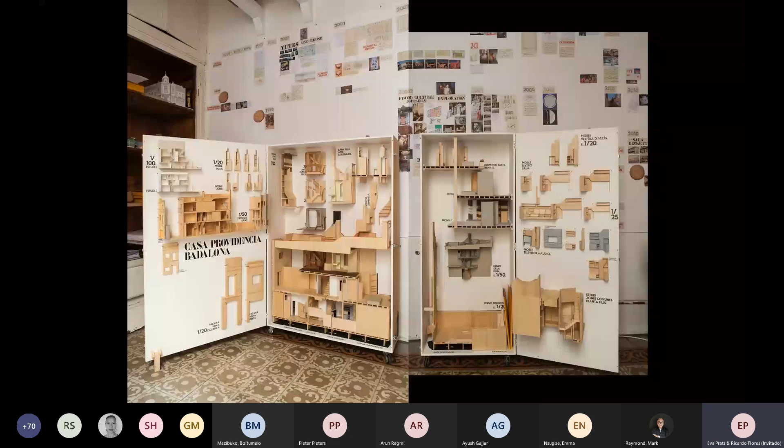Sometimes they are collected chronologically, sometimes by families, by themes, by topics that were investigated. These trunks have wheels and can move along the corridors, as you see them now, parked in the corner, so you can move them away.

This flat is passing from street to court, from interior court here. It's very long, more than 13 meters, and it has these beautiful materials that were very ordinary materials at the moment they were done.

The pavements, the roses, the windows, the doors, they were materials that were done for many other houses in the city. But because of that, we like them very much, because they represent a moment of the growth of the town.

It's important, a very big growth, when the old town turned down the protecting walls. And so there's a lot of these materials, these tiles, and there are tiles in the corridor, in the rooms, in different rooms.

Every room or every part of the corridor has a different pattern, and the patterns are very, very delicately drawn.

See, they are tiled 20 by 20. You can see them. They are small, but they build up a bigger drawing. And you can see every room is different.

They are like carpets in the middle of the room. So every time you enter a different room, you remember a different drawing. And also the doors are different, and the windows as well.

The doors are different, even if it's the same house. Every room has a different way of closing. Sometimes you close a block below, but there's a glass above, or there is a double door.

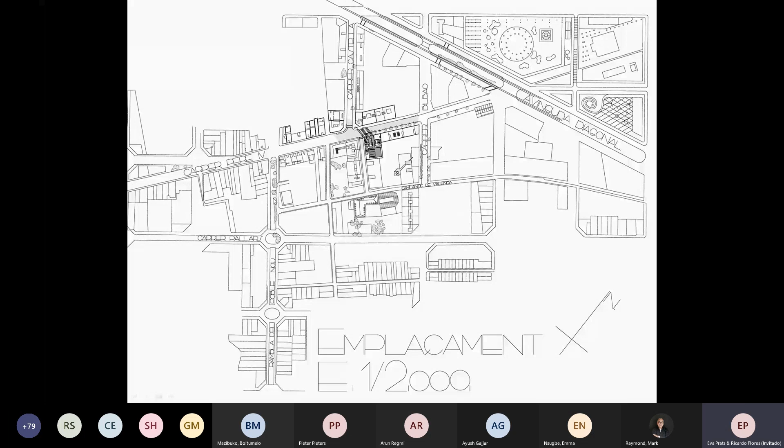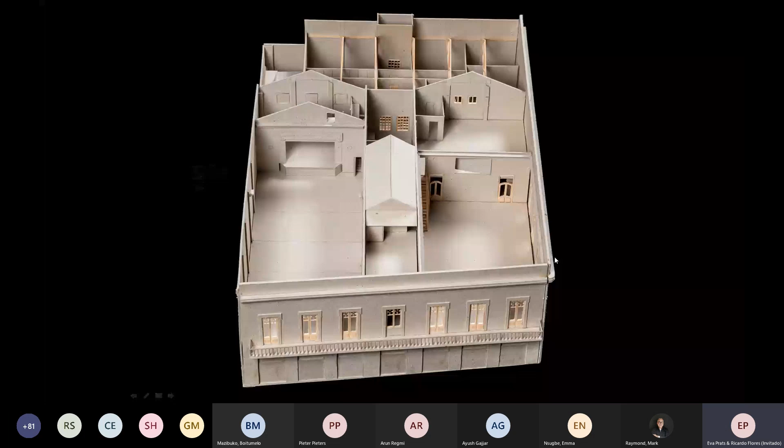So this is the state in which we found this cooperative building when we entered the competition a few years ago. As I said, the roof had been blown away, so there was water inside. The ground floor level was blocked because there had been squatters inside. It was in a very, very bad condition.

But I'm going to show you how before this state, it had a very different aspect. In the 1920s, when it opened, there was a fronton. There was this main facade with a balcony, and on top there was a balustrade and a triangle. The fronton indicated that in the center of the building you could enter through this big door, where we have a man standing, and go straight up to the first floor, where the leisure program was. We used to have a bar on the first floor and a theater, while the basement was completely used as a big grocery store.

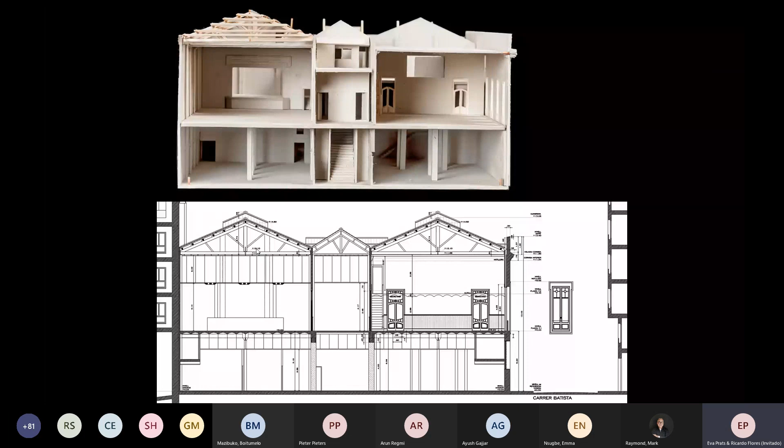Let me show you the ground floor with the grocery store, in the model that we made. On the first floor level, you can see in the center a staircase coming up, on the right we had the bar, and on the left there was a theater. As you can see in the section below, and in the model, they had an independent use. The grocery store was accessed directly from the street, and if you wanted to go up into the leisure program, you'd take this staircase straight to the first floor.

The first floor had this bar with these pools — it was really great, these big rooms, the tiles you can see in the picture similar to the ones we have in the studio, from more or less the same period it was built. The grocery store had natural light and a beautiful, big space. These were pictures from the beginning of this building. But when we found it, when we were visiting during the competition, this space, this room, looked completely unrecognizable.

So it had been blocked. There was a gym for a while that tried to make some business here. So they blocked the facade with mirrors.

The old pillars were also covered. They put fake wood on the floor, and also they started adding mezzanine levels, with smaller staircases and mezzanine levels, so this big space was kind of losing its quality, its generosity. They also organized a swimming pool that was in this stage.

So there were no traces on the ground floor level of this previous past. But on the first floor, we could still find this atmosphere of the 20s. This is the back part of the building. There used to be a school, and walking around, we could get into the scenario, the stage of the old theater.

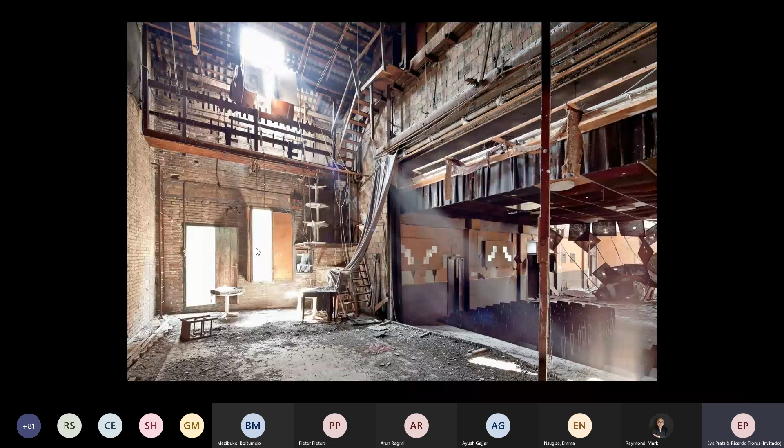As you can see, the rain was cutting in. You see the hole there, and then it was full of pigeons and rats. There were a lot of animals inside the building, but this image was kind of impressive with this ray of light. It really looks like a performance could start at any moment. So even though we were looking at a very decadent building, it had a very much like optimism or energy still to keep working again.

Because the building was not listed, it had been abandoned, it was falling down. Every summer there are strong rains here, and it was not protected. But it was very beloved by the people around the neighborhood. So they were kind of afraid because, even though they couldn't enter the building, they were seeing how the roof got bigger holes every summer.

So some rooms were in a better condition. This is the old bar, but we really liked everything we saw. We liked the generosity of these spaces. And later, we became so much familiar with the kind of tiles and doors that they have here.

Also, there was a comment when we were visiting the building for the first time. The director was with us, with the 5 teams that were competing. And I remember in this room, he commented about the value for them of having these stories written on the walls, even the decadence and the rain that has been inside of it. Because what Sala Beckett does is write new stories and then put them on show for the first time. So in writing stories for them, he thought it would be a very good company to get into this building full of stories already.

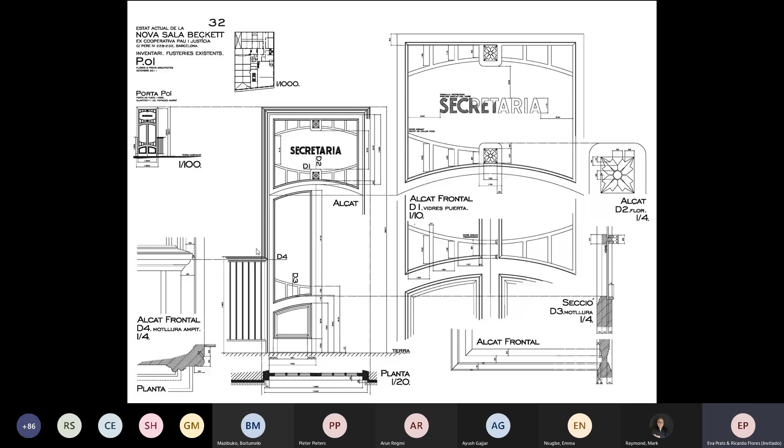And then after drawing them, we also made models of them at 1 to 50. Each window was identified, like this is window number 3. It was like a collection for us, because at the beginning we didn't know - we knew that we wanted to keep everything, but we didn't know where they could stay. But we thought everything we had found inside the building would be left there, and we would move it around depending on the program and the new situations.

So here we are working on a model. At this moment, the project was higher, growing one floor up. At the end, because of budget reasons, it didn't grow. But as you can see, little by little, we were finding a place for these old doors and windows, everything. And they had a lot of colors - this is the gentlemen's bathroom and the ladies' bathroom. So we were also aware that there were a lot of colors in them, and the colors were also interesting.

So I would like to show you a video that explains how much of these doors and windows have been recuperated - the 44 doors and 35 windows for the new Sala Beckett.

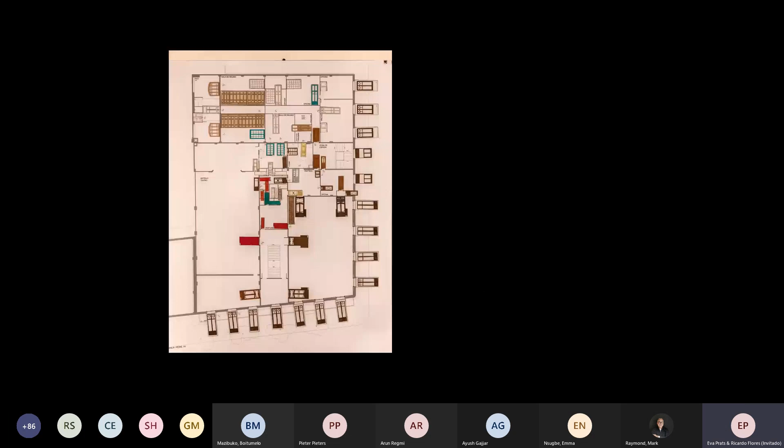You see, this is the initial status of the first floor and the project on the first floor. Then some windows will remain, and some doors will remain in the same location, only changing color.

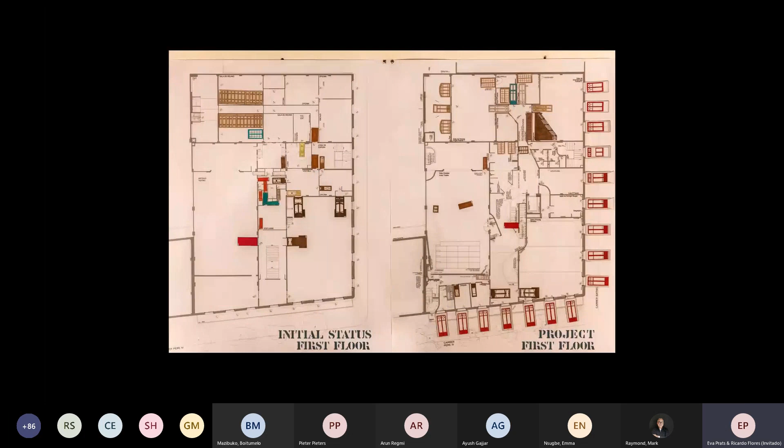But then we start moving. These ones that come from the classroom will go into the classrooms, but in a different location. Even the big staircase, we will remove it. Very small ones for some little offices. Even smaller ones, it goes for the toilets. Very different sizes, even smaller windows flying roof and then landing into another spot.

Once they were put in place, some of them change color depending on the color of the tiles that they found around. And as you can see now, this is the ground floor level of the project, and we still have some doors and windows on the first floor from the initial status that we can use, like these 2 very big doors that will relate the future bar with the vestibule.

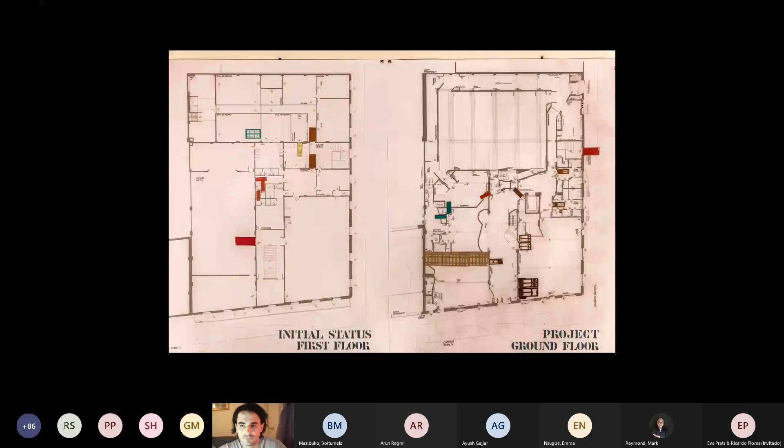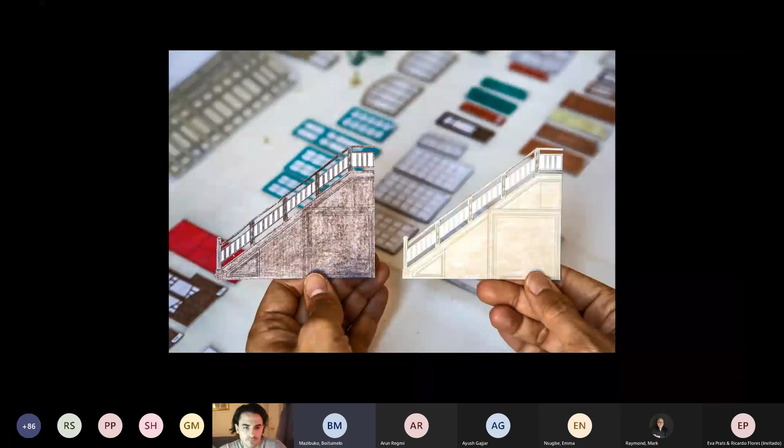Eva, are we still? Can you hear us? Eva, just have a look at your sound setting. We can't hear any sound right now. Maybe just pause the presentation and re-upload it. Maybe check your mic as well, because I can see you are muted. Okay, let's see again. Okay, sorry, let's try to share the screen again. Okay, we can see you. Everyone else, please make sure you have your videos off, your cameras off, and your mics off. Thank you. Let's see now again if we can continue. Okay, then can you hear us? Yes, I can hear you.

Okay, thank you. Well, the video was more or less finished, but could you see the video? Yes, it just stopped mid, maybe close to the end of the video. Okay, good. I'm sure your mic went mute, yeah.

Okay, no problem. So, well, there were colors not only on the windows, but also on the walls around us, even though they were in a very ruined condition, but we drew them because we understood that in this project, it was very much about these traces on the walls and colors.

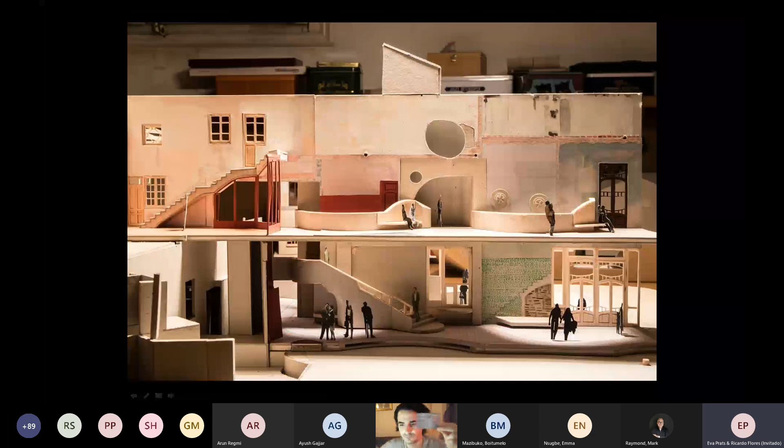So we started applying these colors on the model that was made with this gray cardboard. We started putting color in it. And also in the model, you can see the point of the project, this rehabilitation of the building with this adaptive reuse in it.

Probably it's where a lot of energy is made. We have a floor slab here, and there is light coming. It's a new floor slab, and you can see there's light coming through this hole. There are 2 holes here that you can see by the spot of light underneath.

So this vestibule connects the 2 levels. At the beginning, as I showed you, we have the section of the previous state above. As you can see, with this floor slab, there is not this visual connection between the ground floor and the first floor. But with the intervention, it deals a lot with how to connect, because the project, in this case, the program with the Sala Beckett people, works all together.

So ground floor and first floor are kind of linked. There is a theater upstairs and a theater downstairs, and people go to classes on the first floor, but from 10 in the morning when they open until around 11 at night, there are things happening in the building. So it's not just the theater that opens before the show, there are all day things going on. And as soon as you enter, this vestibule kind of indicates that it works on 2 levels.

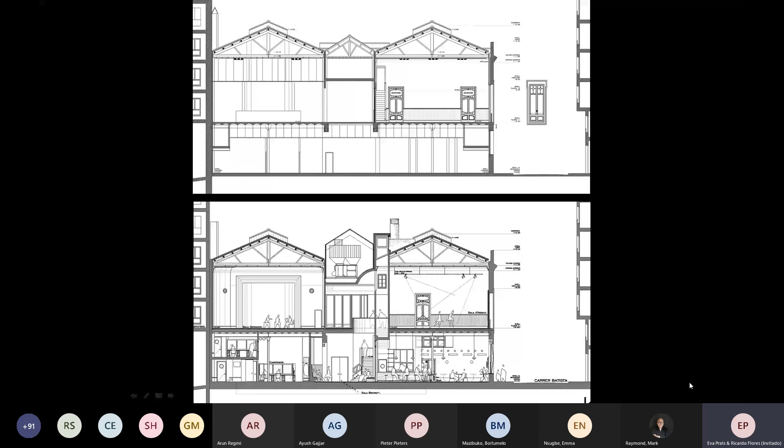So all these are very big windows, and also you have another entrance to the bar from this side. So the public will enter the theater or the school from here, from the central door, or from the bar. And there are different entrances here. What was interesting also about drawing a theater is that there are very public spaces open to everyone, and suddenly there are smaller ones, secret ones, that hide circulation and other actions also.

So the people from Sala Beckett who work here usually can enter through this small door, and also actors. The actors and actresses will go in through here. They have the dressing room, and from here they will arrive at the main room. And the main room has a lot of corridors around that the actors can appear from any direction.

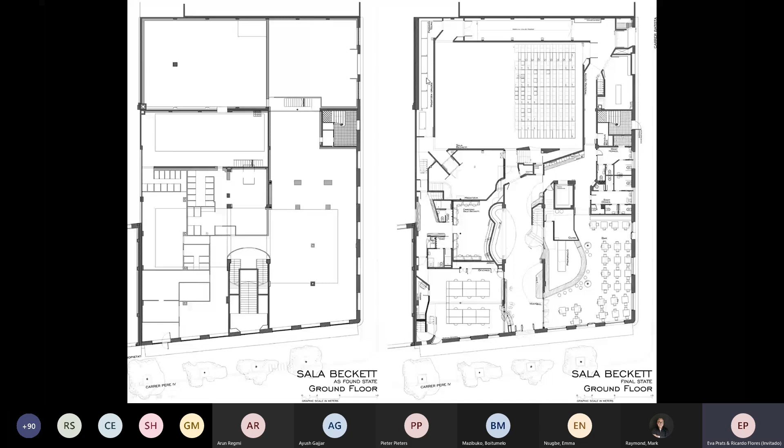So in this model that grows, we can see the wall, one wall here that contains seating, that's closing here. And from this ground floor level, you will arrive at the main show, the main theater space.

Okay, there is a mezzanine level that we found, a lot of mezzanine level. We broke some of it, but we leave some spaces for the administration and dressing room. We took it away because of the bar, we kind of recover. We want to recover the big volumes.

There is a club for the authors here. It's a very special place because from here, from the window, they can look who's in the bar. But also they can go kind of secretly and have a look from the control cabin at what's going on the stage.

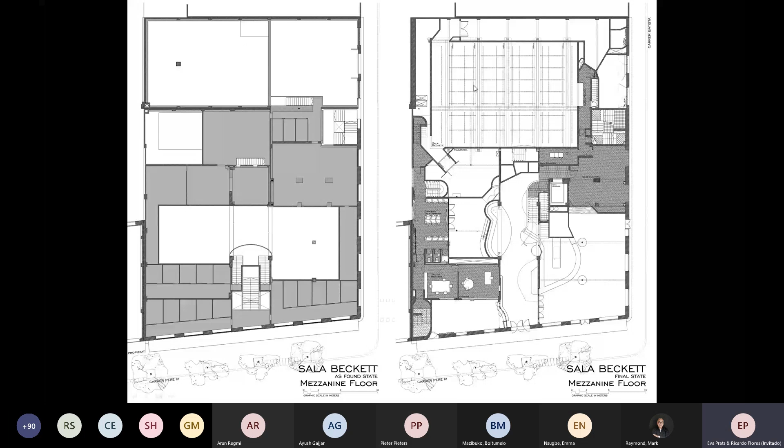So there is, in the model you can see here, these 2 theaters working on this building. We have the one downstairs. This part is the old classes that keep working as classes nowadays, and we have 2 dressing rooms, one here and the other one above.

So the one above is for the actors who will play in the theater above. That's the old theater that we found being kind of restored, and the roof has been restored, but it doesn't - before it was longer. Nowadays there is a buffer area in between the theater and the street that it's occupied by offices of Sala Beckett people.

Okay, and I'll show you the first floor, how it works today. So you can see the old bar, now it's a rehearsal room in the corner, and the old theater was very long, now it's shorter, and here we have the offices.

And this corridor in the middle, we have worked to make a connection of it until the classes area. In the old building that you can see on the left, the school, that it's a building that came like 20 years later, was built with the same dimension of these 2 warehouses in the front. But the connection among them was not interesting because this was a program of school and there were some doors of connection, but it was not so important to have it connected.

Nowadays, the corridor in the middle, as you can see in the drawing, is a continuous path that you take from the facade until the bottom of the building. It's interesting what I was saying now, the different circulations, because here is all the public circulation in the center lobby, and then you have all the private circulation of actors and technicians in the back. So there's a lot of possibilities of connecting or disconnecting, or walking, hiding from the public, depending on the moment.

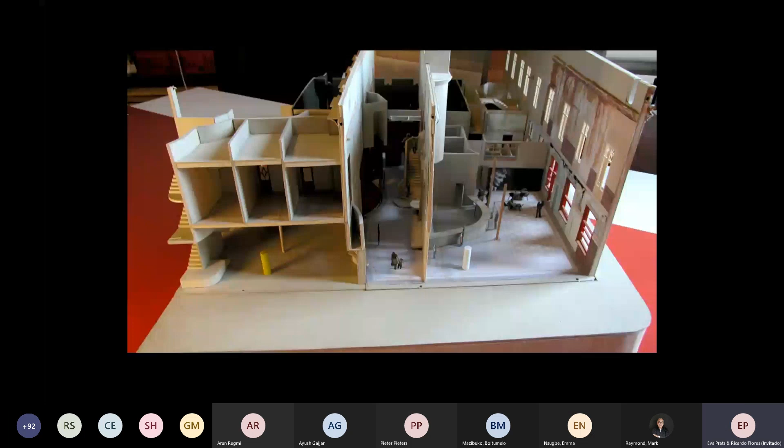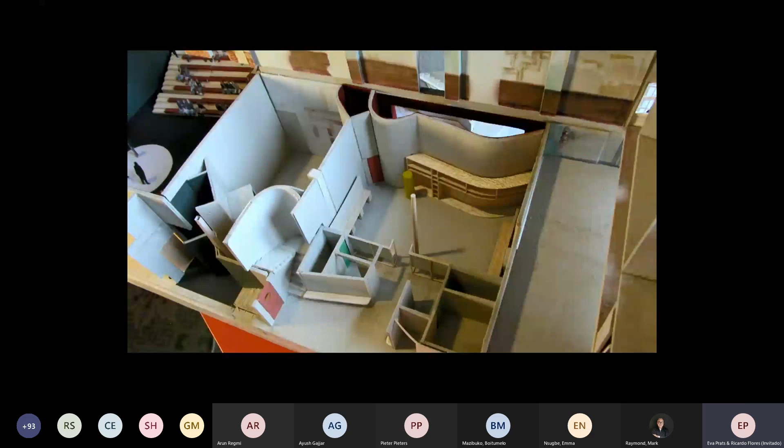In the meantime, the actor goes to the dressing room to rest and to rehearse and to concentrate. It's interesting, this wall in one side has the dressing rooms, in the other side has the sofas, with the public enjoying. You see two very different situations.

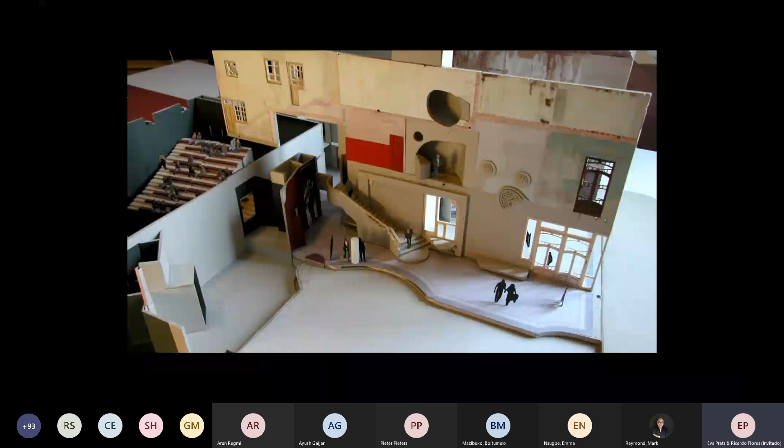Then the actor goes to the upper level because apparently they are going to perform in the upstairs theater tonight. So the public also goes upstairs to wait, to make the queue. And then it enters to the room, to the upstairs theater. In the meantime, the actor also waits in the backstage.

And then the third character appears, which is the technician. The technician goes straight to the control cabin.

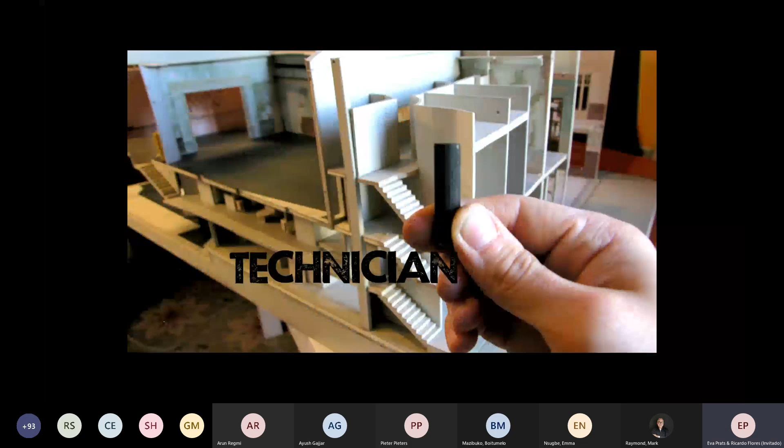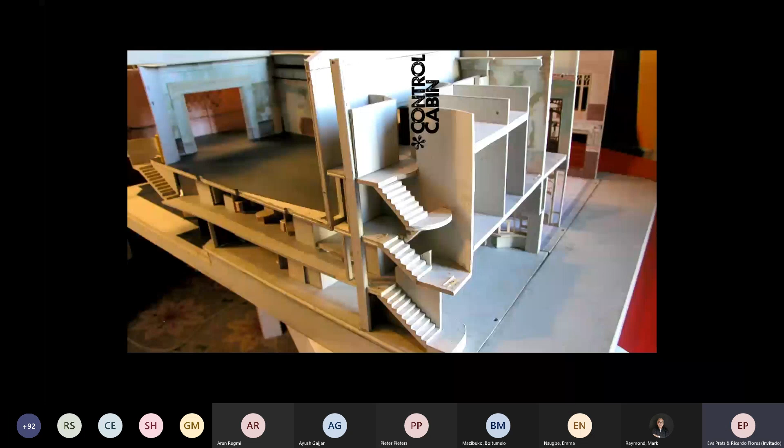And then from there, he controls all the rooms. The different configurations of seats and audience change all the time because the seats are movable. So depending on the play, they change position.

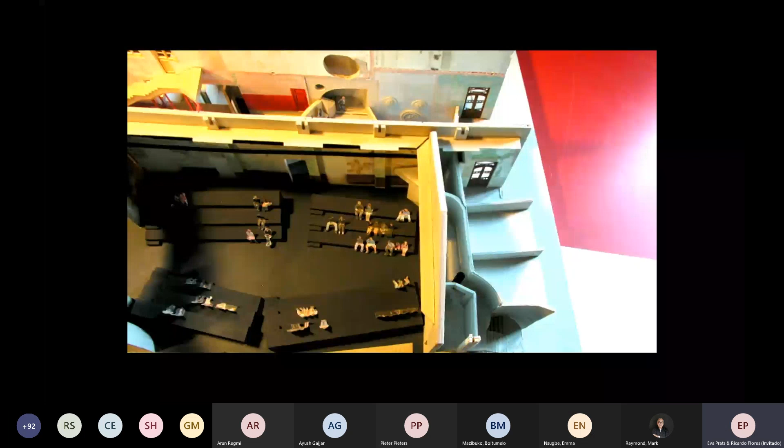When they finish, they don't hide anymore. They like to go into the vestibule, and you might find the actors or directors there. As a member of the public, if you go out and stay around, you might find the actor who has finished, and you can speak a bit and tell him or her how much you liked the play. So everyone ends up together in the balcony, looking to the street and smoking for a while.

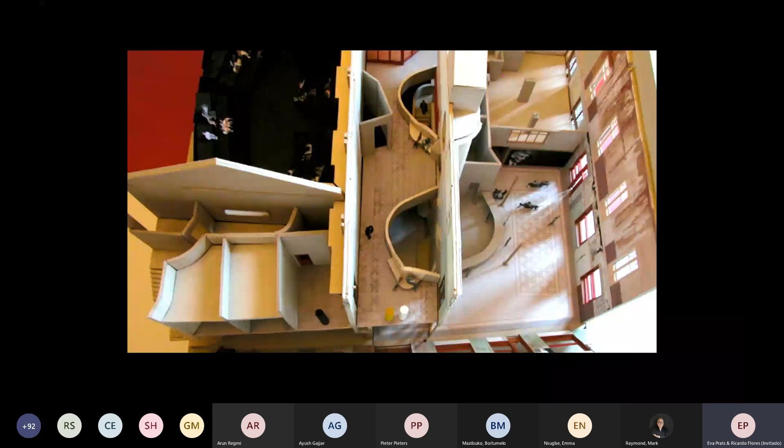Okay, so this is the situation of the project. Now I want to show you a bit about the construction site, because the construction site is very violent. Of course, it's always very violent in a rehabilitation project, in adaptive reuse.

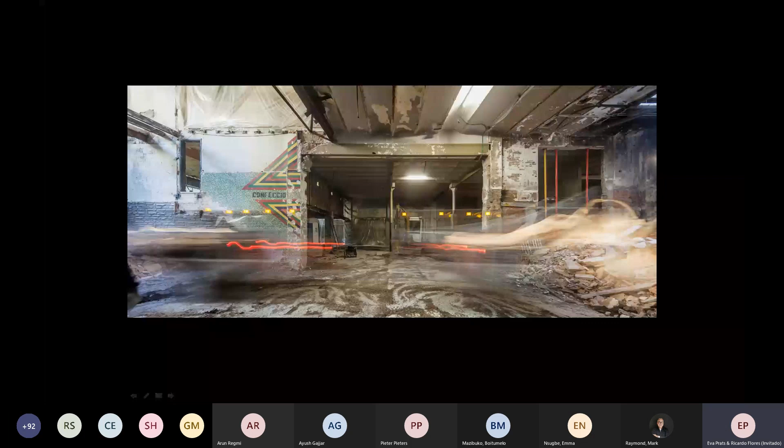So the first thing that happened in the project was to take out all the tiles, all the windows, the doors, everything that Eva showed you as an inventory that we have drawn to recuperate, was brought somewhere else to a storage place to keep it safe, while the building was being reinforced structurally and acoustically.

So we had this moment where when you take everything away, all the doors, all the tiles - fortunately we have drawn all the tiles as well. Every room, every drawing, every tile was inventoried and packed in different pallets of different patterns in storage, to remember which were the ones, each one in which room, and where they will come back, where they will land. So at a certain moment, the building is almost nude, all the naked.

Then we start to reinforce the structure, the floor slabs, also for fire, then for acoustics, all throughout the building. And in the meantime, in the lower level, we were taking out the pool of the sauna that we found there, making room for the downstairs stage or theater.

So we were lowering the level a bit, finding the earth, the original earth of this area, which used to be cultivated a bit more than 100 years ago. So we found this place.

Then there was this portico. Before, you see this wall, that was a wall of this later nave that Eva was mentioning before. We had to take it out to make a wider room of 15 meters width. So we had this big beam holding up the upper level wall to make this span with this portico structure that would allow us to have all these different configurations.

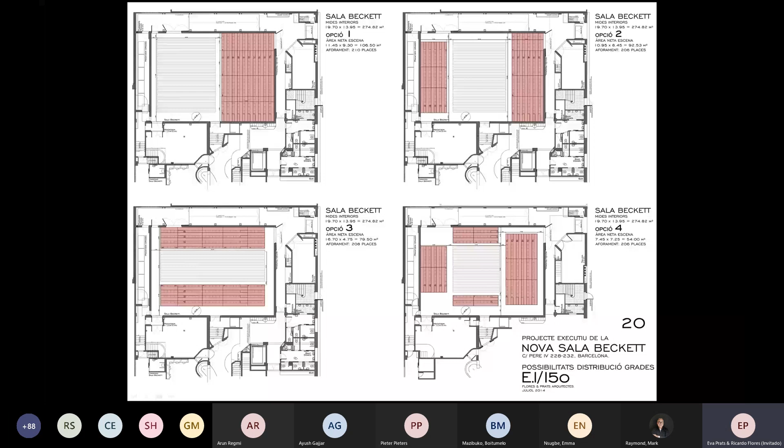The model would also allow us to understand the structure, the porticos that you see now in the ceiling, with all the technical conditions, all the mechanical installations, all the lighting, etc. So it was a model that later on we could bring to the site.

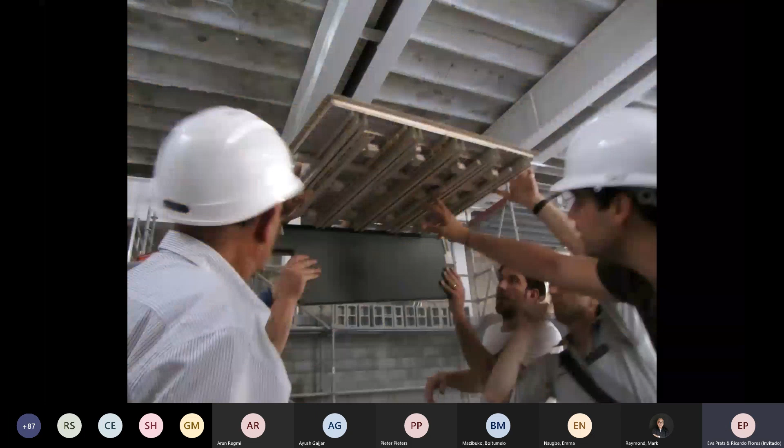You can see the real thing in the back of the model, but we were signaling, pointing where we'd like to have the diffusers of the air conditioning, and so on. So the model is for the competition, for the first assumptions, for the tests, for the evolution, for the technical aspects, and also to go into the site. It's something that accompanies us all through the process, all the way through the project.

So then you see this overlapping of the two rooms, the downstairs theater and the upstairs theater. They are overlapped, so the disconnection should be very, very strong. Before making all the floor, we had to make all these acoustical protections.

The upstairs theater is very special because it has the former walls and paintings of the former upstairs theater of the cooperative building, and also has natural light. We left all these windows, this beautiful light coming into the stage, so people at Sala Beckett can make theater during the day, having natural light, or in the evening.

You can also see all these former walls, remains of the former theater of the cooperative out there. Notice how before the wood was positioned, there's a floor slab that was an acoustic slab separating it from the downstairs level, then all the wooden structure, then the floor, and so on.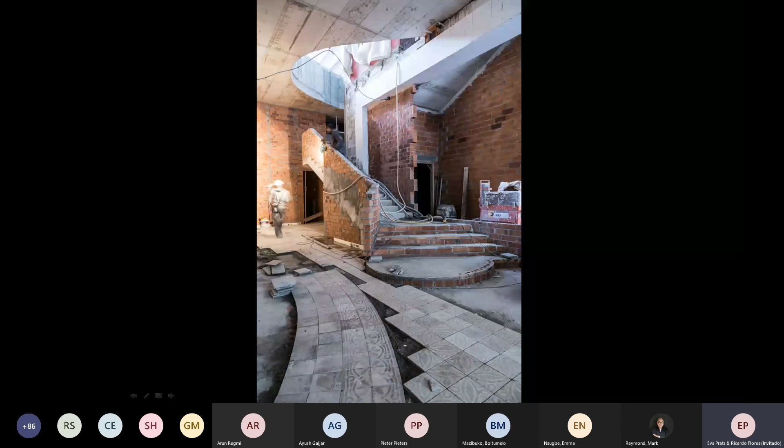So they create this new drawing which, of course, wasn't like that before, because it was in an orthogonal position. But now it's important that they follow through and make you understand that you're walking on the same ground when you're in the vestibule, the dressing room, the bar, and so on.

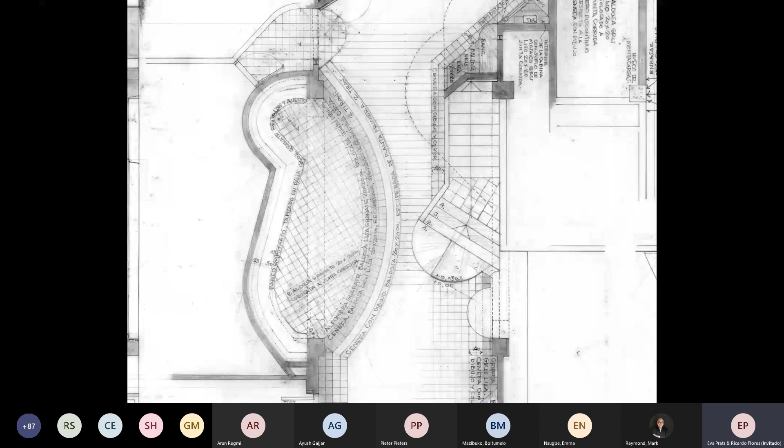All these drawings were for connecting the different levels, the ground floor you see almost on the left, the upper level on the right, or more in the center. All of this drawing is a big plan of the vestibule.

When we draw important pieces of the project, we try to make them on big sheets of paper that could contain all the dimensions of that element. For example, in this case, the vestibule.

So it's not only the plan, but also facades at scale, sections, details of the benches, everything involved in the vestibule is in the drawing.

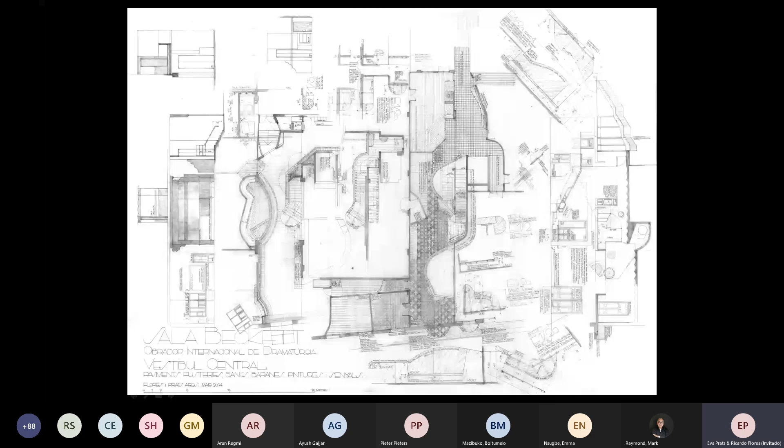Because when you walk through the space, you don't only look at the floor, but also at the handrails, the ceilings, the sections, everything together. So your eye moves from plan to section to elevation in continuity, and it's important for us that the drawing contains it all.

When you draw it all in continuity, plan, section, facade, elevation, ceiling, and so on, in one continuous hand drawing, then the space contains that kind of fluidity, and when you move around you can feel that articulation.

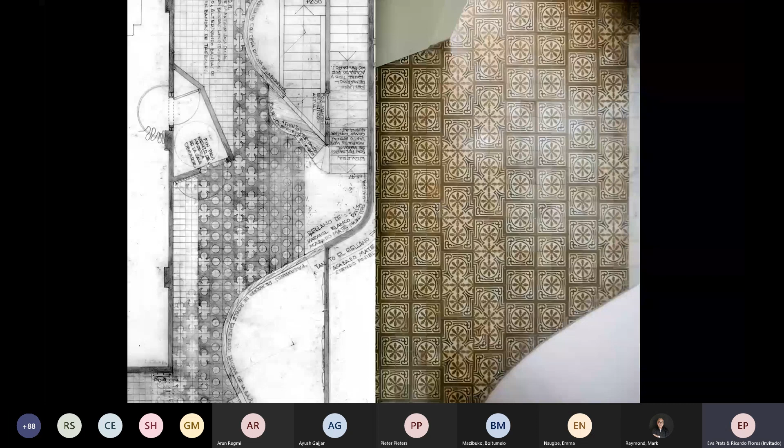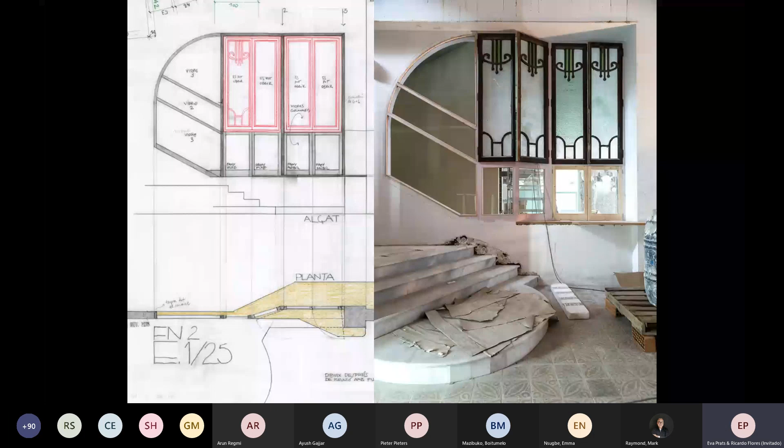It was an intention of melting the different times of the project into one continuous time. Because in the construction, there was a moment for the doors and windows to come back to the building. At this moment, everything is full of dust, but the windows arrive.

So all these things around us, and I remember the builder was asking us how to paint all this. We were looking around and thinking, there is so much information in these walls that if we decide to paint the new parts we built in one color, it would be too much of a contrast. So after discussing it, we decided we would paint also by fragments.

In this image, the volume you see on the right that pops out of the wall is a cabin to stop sound from entering the theater upstairs. We left the plaster as it is with these different tones, and we painted some kind of socle, but as you can see, it's painted completely in fragments. The same wall on the ground floor, the red wall with the sofa, is also painted fragmented.

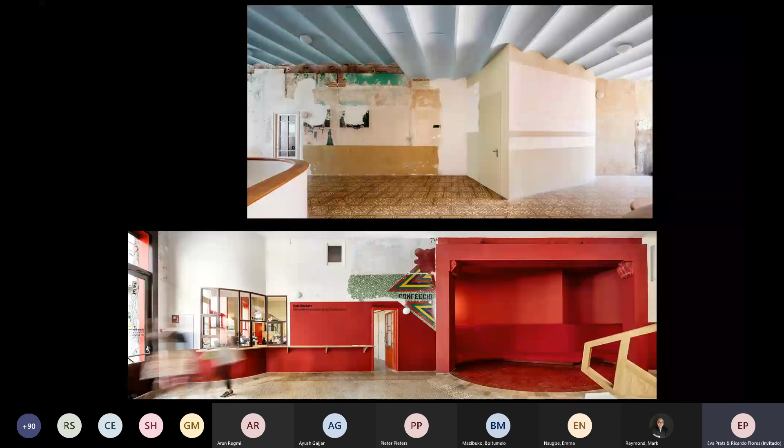So when you enter this building, the information you receive is kind of constant. There are new parts, and the new parts are painted in different colors, so it creates a kind of continuity in your mind.

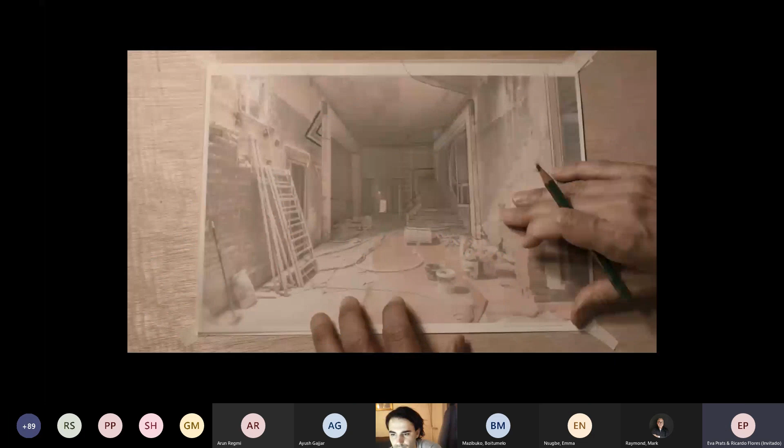Then we decided how to decide where to apply color or not. We took pictures of the construction as it was, and then worked on transparent paper over them. We first mapped the colors that were already on site, looking for clues on how to keep painting, but we did it scene to scene.

With this picture, we decided about the vestibule, which was also very fragmentary. So this door becomes red, and here we are in the bar. The pillars become green because we have some green tiles that have been left. This door will also become green. The old theater had green and brown, and we distributed colors using these first clues, also deciding about the new wall—this curved wall is new, but we painted it the same.

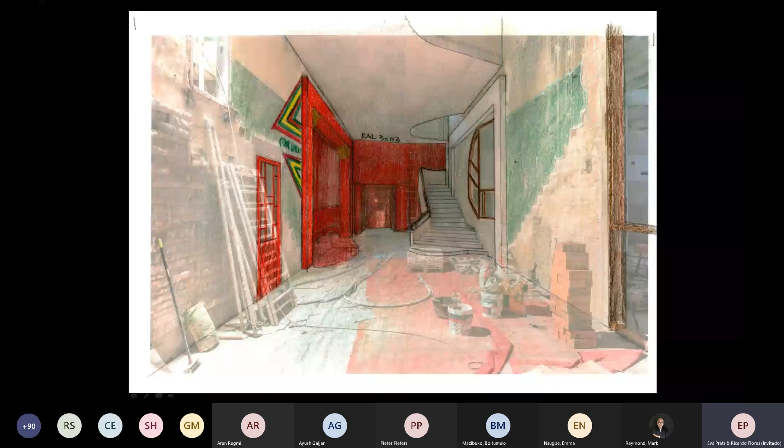So this was the method we used to decide about these colors. When this drawing was finished, we hung it on the wall of the construction site, and the painter would go there to check which numbers to use. You can see the numbers of the codes for the different colors.

For instance, this is interesting: all these walls are new, it's a dressing room downstairs. The tiles come from above, from upstairs—we reuse them, and then we choose different colors depending on the tiles. But we also change the color depending on the wall to make a variation.

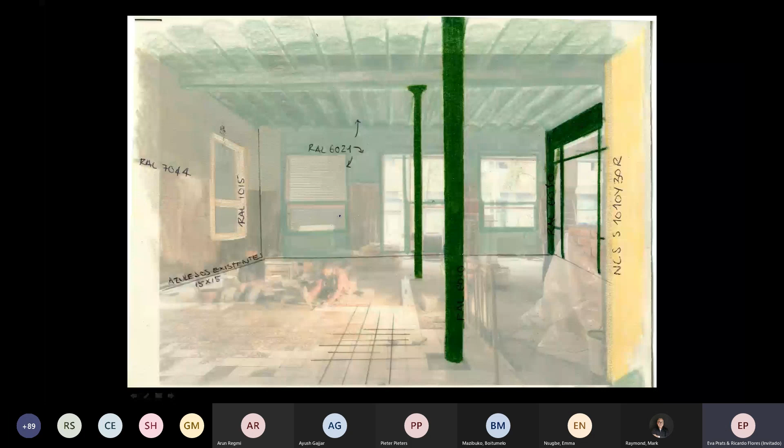In the bars, you can see a lot of green, and also the big doors that came from above, where it says 'Secretaria'—this one is painted green on this side and keeps the brown on the other. So all these different tiles and grocery store cans give us clues for the color, and we left this accumulation of time on the walls. There are big windows, very big windows—one is green next to the green tiles, the others are white.

At the end, we had the sections of the building, which were just lines in black and white, and we kept adding this color information. So we archive it, so that when they have to repaint, they have these documents, and they can check which color to apply. In the central space, as I told you before, is the vestibule, where the intensity of the building is very much concentrated.

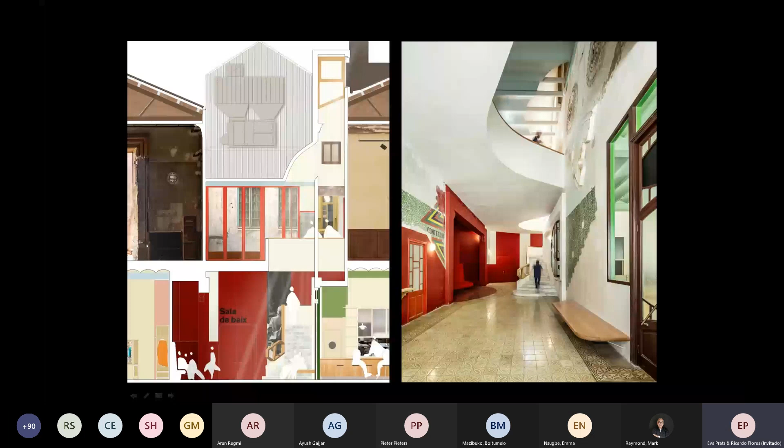On the picture on the right, you can see you step inside the building, and in two steps you can see upstairs there's something going on. So the building works together for the ground floor and first floor. And we have light coming in. You can see on the left, there is some light falling from above. And we have a lot of machines here.

We wanted to have a skylight in the middle of the building and bring energy to its center. But the engineer was asking for bigger and bigger machines each time, so at the end we had to take the light from one side. At the beginning this skylight was direct, but in this case it became more interesting because of the engineer, and we made it come from one side. So here you cannot see the hole where the light is coming, but you just see the effect of the light coming down. It's here.

We have the rosettes of decoration, and this is a drawing we made at the end of the work. It was a very intuitive decision, and when we discovered it we decided to make a drawing on this wall, because all the decoration, all the circulation and the light is kind of dedicated to it. The entrance door, the staircase is here, the skylight comes here, and you trespass this wall several times.

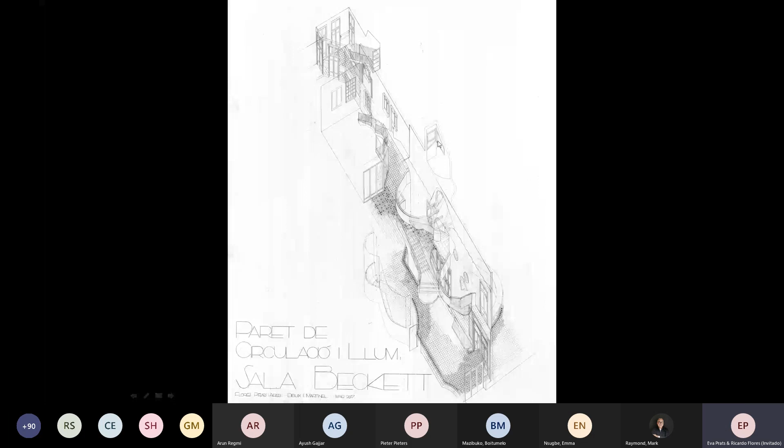You can see it also here in the model. It's this very thin wall, 15 centimeters thick, and it has the lights and the circulation around it. We trespass it here, and we have these two sides. It's very theatrical, how you appear very quickly into the vestibule, and you will cross the wall again here on the left to get into the classes at the bottom. So you have these very long views and cross views.

So it was interesting also to see how, when we opened it again to let the light trespass through it, there were more actions kind of against it, but also to make it participate.

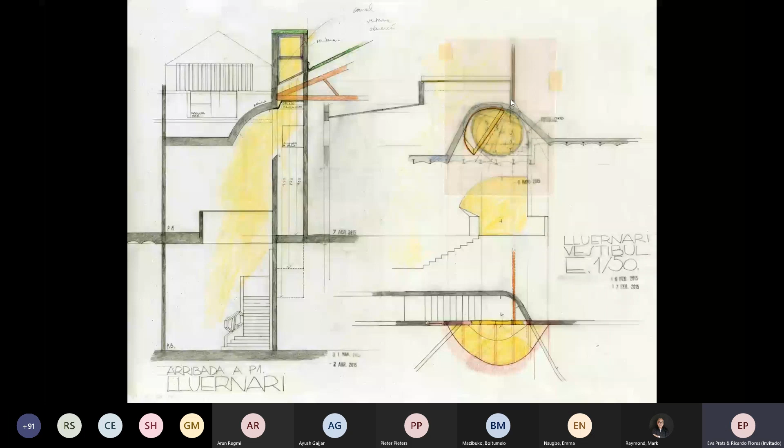So these are the drawings to make the hole. At the beginning, the hole for this wall was circular, and it had to be just half a circle, more or less, because we have a structural wooden truss here. We had to be careful. So we opened this kind of half, it's a quarter of a sphere. So we broke the floor slab, we made the hole here, and the light is getting in.

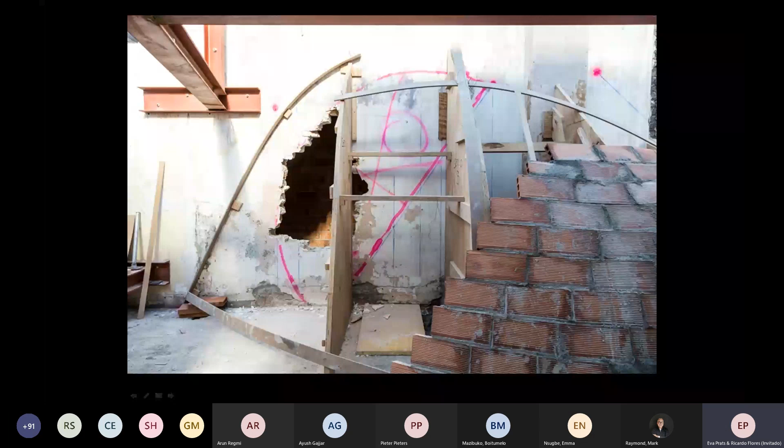So we asked to make this kind of half circle here, breaking it. It was not clear at all for the workers what they were doing when we gave this instruction, because from one side they were building this quarter of a sphere, and then breaking it to get light through, but on the other side there was still a wall. Some days later, we had the natural light getting through the wall again, and the floor slab had been broken, and we could see how this quarter of a sphere was being filled in with the natural light.

This point is kind of the central point. It has full intensity. Somehow it keeps a lot of the chapters of the story of this building together, because we have the new openings, the new distribution of Sala Beckett that has happened, and it's left here with this opening of the skylight. But you can also see the old decoration, the signals of decadence in the wall, because the rain was in here.

So for us, it reminded us somehow of what we saw when visiting the building for the first time, that we had this ray of light right there, kind of waiting, bringing energy to the building, but the building needed some care. So there was this connection among the two of us.

Among these two moments, we were invited to the Venice Biennale to participate, and the curators, Grafton Architects, were talking about free space and what the architect brings to the building besides the program, like working with the skylight. No one usually talks about this in the program, and we thought about bringing this skylight into Venice. So we made a mock-up, also because Grafton Architects were talking about having an exhibition that was experiential, not of objects. So we thought, let's build it in 1-to-1 scale, so that we will have this 18-20 meters long and 6 meters high section, as it has in Sala Beckett, and then we will need a source of natural light to make it work.

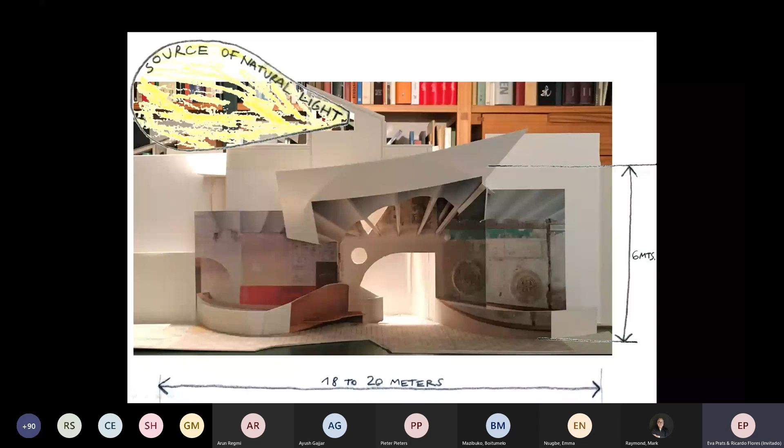So this was our proposal, and they accepted. And then we knew that we were going to be in this arsenal, in this building that they used to make the ropes for the boats.

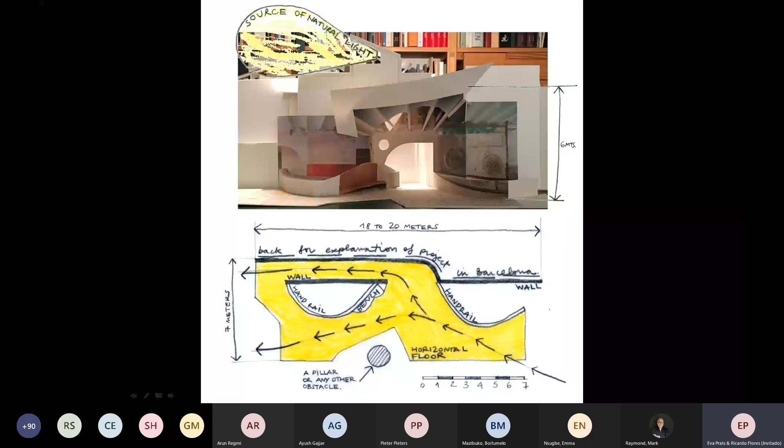In the picture, the camera doesn't show it, it seems a symmetrical building, but in fact on the right hand we have south - we're in the north hemisphere here. So south is where the sun comes, and the north has the regular light. It works opposite to you.

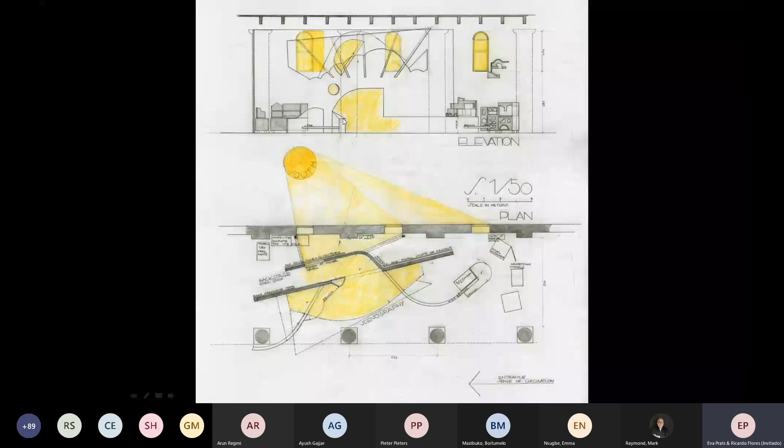So you can see there are the three windows of the Arsenale, and we will funnel the light, control the light, and as you can see here in the back, this is a funnel, and then all the light will appear at the other side of the scenography. We call one the scenography for us, and the other one the backstage.

We were controlling the light with a model in the studio, knowing how it controlled. You see what intensity of light we get here. And this is the backstage of it, and the columns you can see are the columns of this old building.

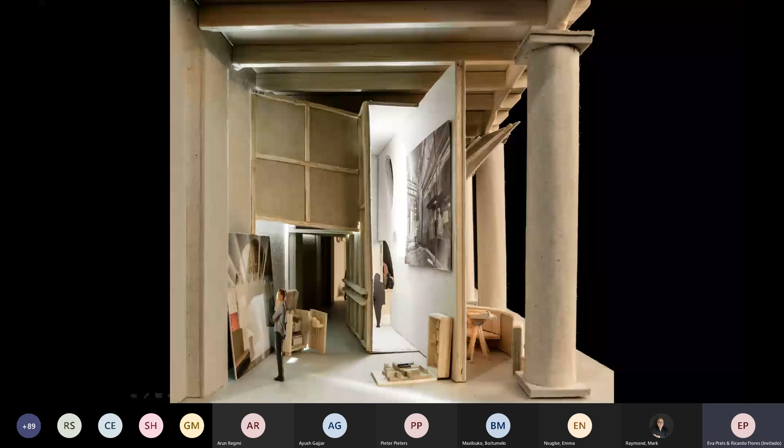If we compare the skylight on the left of Sala Beckett, we can see that the light is more vertical, so when it works as a shower it has more strength. In Venice, we had to deal with more horizontal light, so it won't be that strong.

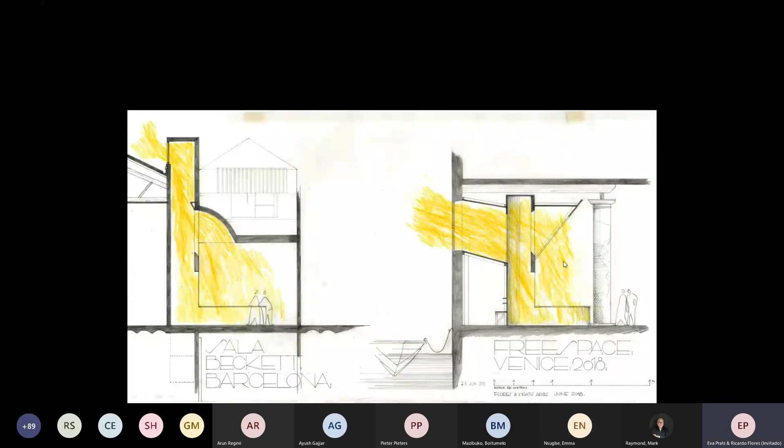That's why we were using two windows concentrated in one. These are more pictures of the model of the display.

The skylight space in Sala Beckett is 6 meters, and it fits very tight into the building. We liked it somehow, that this piece was going to be that tall and almost touching the columns - this kind of collision with the building.

We had to build everything in Barcelona, controlling it from here, also testing it here, sending pictures to Venice - they accept it, and everything travels there. And in Venice, we only had to screw it together.

This is the back side of the model with the funnel, and this is the funnel part in the carpenter's shop. So you see, in this part of the backstage, we have this table and two shelves, very long.

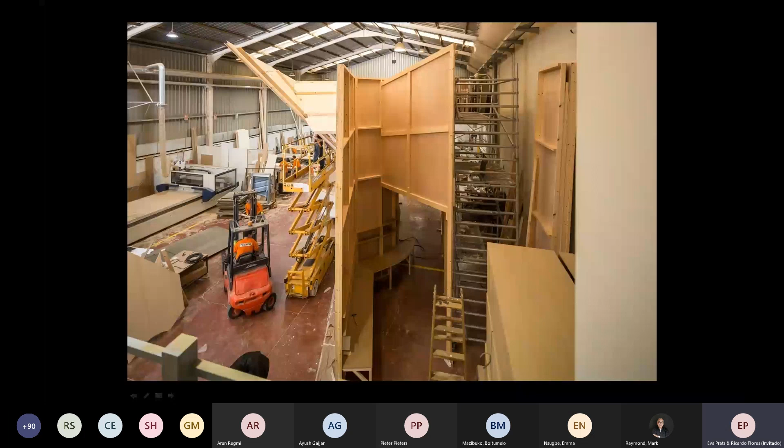This 18 meters, we decided to fill them up with all the process material that you get in the office when the building is built. But in the office, it's everywhere - there are models, documents. So we were collecting everything from the rooms and bringing it to the biggest room we have in the studio.

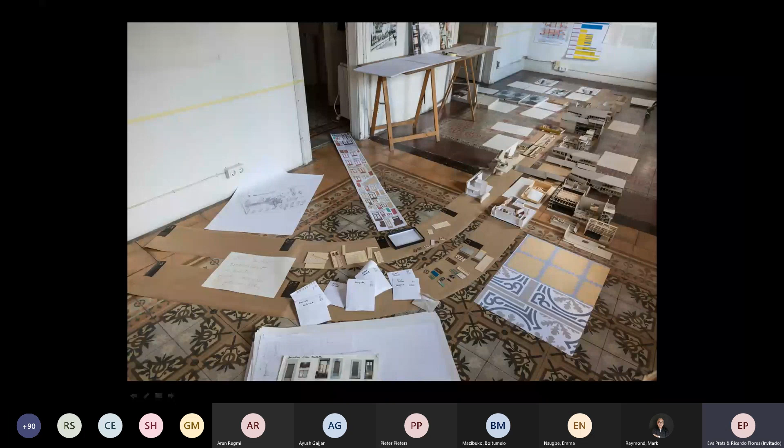Trying to make some order. After a few days, it was packed - it was kind of, we couldn't step on the floor.

So we asked the help of a carpenter who built this table, the same size as the one on the exhibition, plus the two shelves. And we could reorganize again all the models and everything.

Okay, the room was filled, as you can see there is the door. We had to go under the table to get into this room. And yeah, from here you could sit, and you were quiet in a way when you were drawing and finishing.

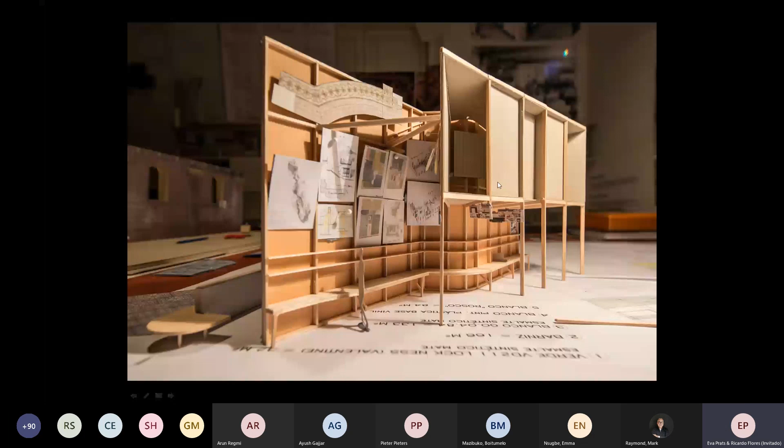Also because our room was not as high as the final exhibition, so there were some pieces that we were controlling with the model. We had to make sure that everything we would bring to Venice would fill all the area we had to predict.

So here we had the 18 meters on the right, and on the left we had all the surface, all the area that we had to fill in with objects.

So this was happening in this room, and then the rest of the office was also very busy organizing the Biennale models for the Biennale.

A friend of ours, an industrial designer, built these legs for the models and some benches, and everything was in the corridor everywhere. Some people were painting these kinds of containers to be ready for Venice and to show what's inside. We were traveling also with some of these containers, which are very convenient for an exhibition, because as soon as you open them, things appear very well organized.

This is the first project we did with Sala Beckett, when there was more budget and the building was growing up. You can see there are two possibilities for a hat for the building. Now we are taking the hat with Ricardo. The existing building is still up there, and there were two hats we were proposing for this model. With these containers, you can move around and see what's going on.

So we travel, these boxes travel to Venice, to this Arsenale. Everything has arrived here, we have to start displaying it. A few days later we arrived to Venice, everything was waiting for us there. So we were very fast in going, very at the beginning of the possible montage.

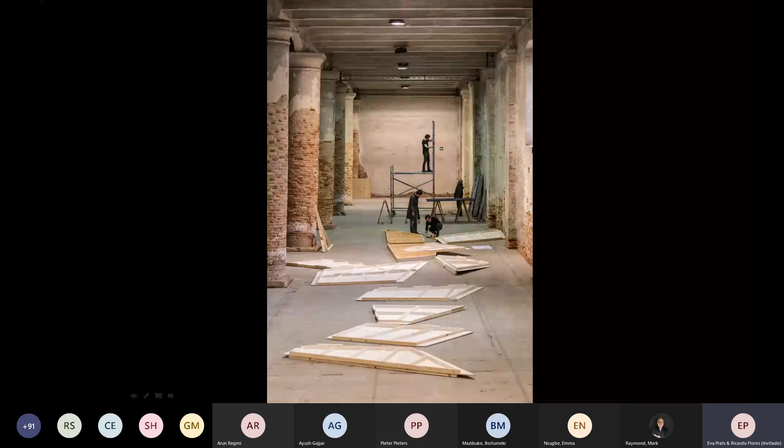At the beginning, the first layout, the first wall was crucial to lay out very well, because, as you remember, Eva was saying, it is located against these two windows to the left. They had to funnel the light of these two windows, so it had to be very precisely drawn on the floor and built up. On the other side of these two windows, it was these very beautiful situations in Venice that you find, these canals with water that reflect the light, very silent and very beautiful condition out there.

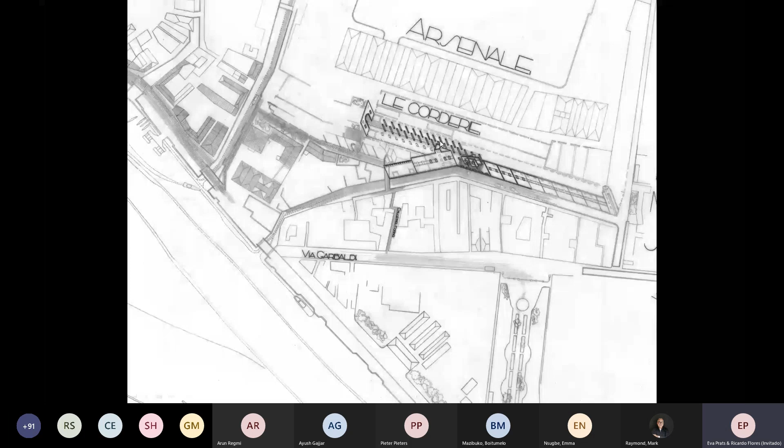At the same time, we had another commission in the same moment for the same Biennale. Francesco Dal Co, the architect and director of Casabella, was the curator that year for the new appearance of the Vatican country in the Biennale. They wanted to be part of the Biennale, so they asked him to be curator of the pavilion for the Vatican country.

So he proposed to build some little chapels in a forest, a forest he knew how to access, behind the San Giorgio Maggiore chapel by Andrea Palladio. You had to take Vaporetto number 2 to cross from San Marco to San Giorgio, and then behind the beautiful church of Palladio and the cloister, you found this beautiful hidden garden.

He commissioned 10 different offices from different countries to build a little chapel, remembering the wooden chapel from Asplund that had been built exactly 100 years before. These offices were from different places in the world, from South America, North America, Europe, Asia. It was interesting because even though it was for the Vatican country, you could choose not to respond with symbols—you were free to accept the commission and interpret it as you wanted.

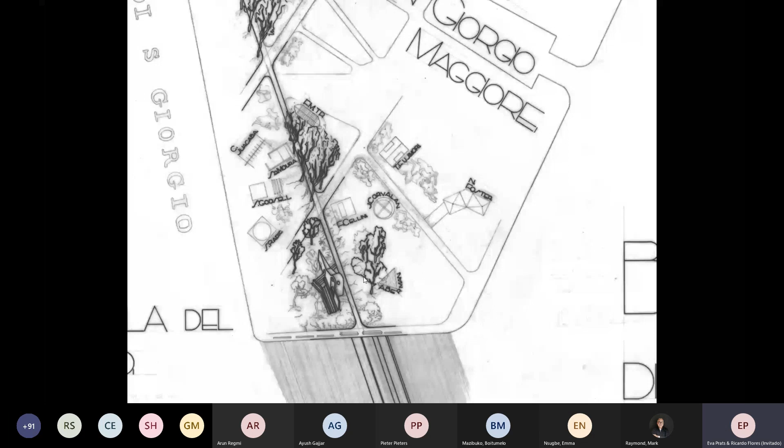So we asked Francesco Dal Co if we could choose the place to locate our chapel, and he accepted. We located our chapel on this road, the longest path when you come out from the cloister, right before you arrive at the water. It's a chapel that connects this path and the forest, a very beautiful forest of old pine trees.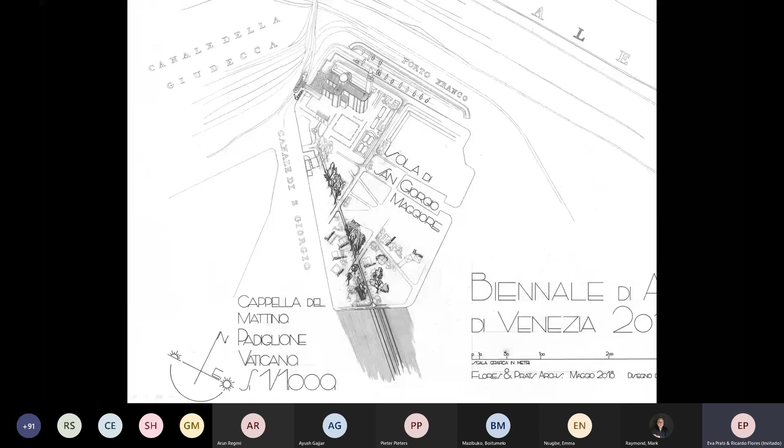On this island, in theory, it's written that there was a monastery in the year 1000, and there's no remains of that. But we thought that this chapel, this fragment of a chapel, could be a fragment of the former monastery, a former church or temple that was there. We thought all the time that this could be a fragment of a forgotten chapel, the remains of a ruin of a former temple that was there.

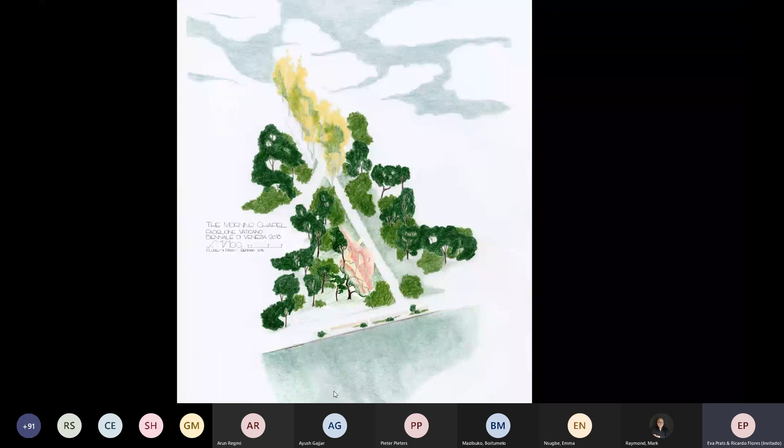And so there was a door, this door that welcomes you into the forest, that could be like the natural temple.

So once you cross the door, you find this excavated chapel in the width of the wall. The wall contains the chapel. It also contains an oculus and a hole that lets the light in. That's what we call the morning chapel—it gets the first ray of light in the morning that comes into the forest, crosses the chapel and gets in. So it's like a lateral chapel of a temple, of a church that you might find there. It's in the border, a door to the forest.

Here what Eva is drawing is the connection between the sun, the chapel with the oculus, and the trees and pine trees that are there. We have this beautiful old drawing from Ivan Leonidov that we interpreted. It was a pavilion in a park that he drew. We changed this pavilion into our chapel because we thought of it like a little chapel in the middle of a forest that you suddenly find.

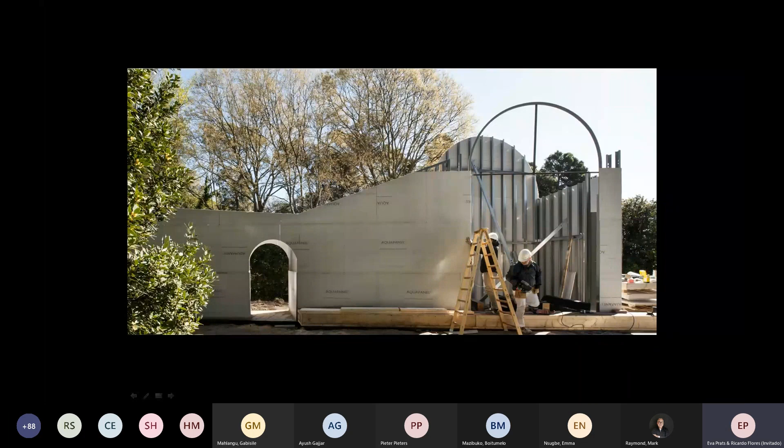But this chapel, besides saying it's a ruin, was built for 6 months. So it's all done by plaster—a fake thing, because it was only for the Biennale, even if later on it stayed there and still is. But at the moment of building, it was supposed to be for 6 months. So it's all kind of plasterboard with a metal structure. And you had this very flat condition, very beautiful also when it was built up, trying to build this condition of being a solid thing out of plasterboard.

So the structure is very simple. It's a wall that becomes thicker, and in this thickness you have the door and the chapel in there.

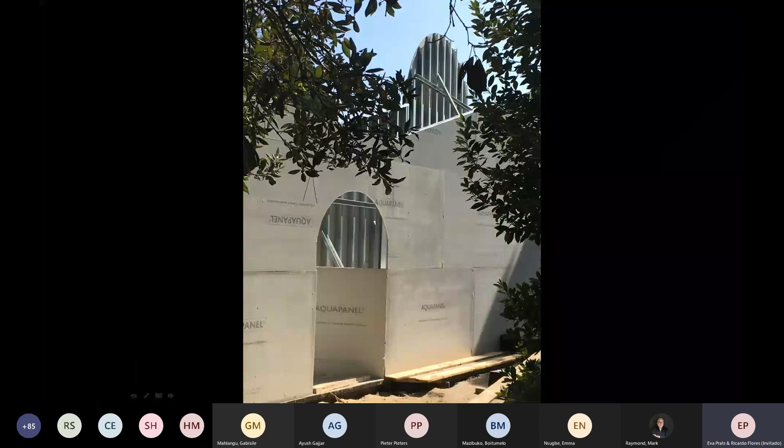At the same time, on the other side of the island, we were building this fragment for the FreeSpace exhibition, the Liquid Light, as Eva was explaining before—this big installation, this big scenography, a little bit of Sala Beckett into Venice from Barcelona. And you had the backstage already there, the two windows to the right. Now the doors came, the shelves there, the connections to the wall, everything was there.

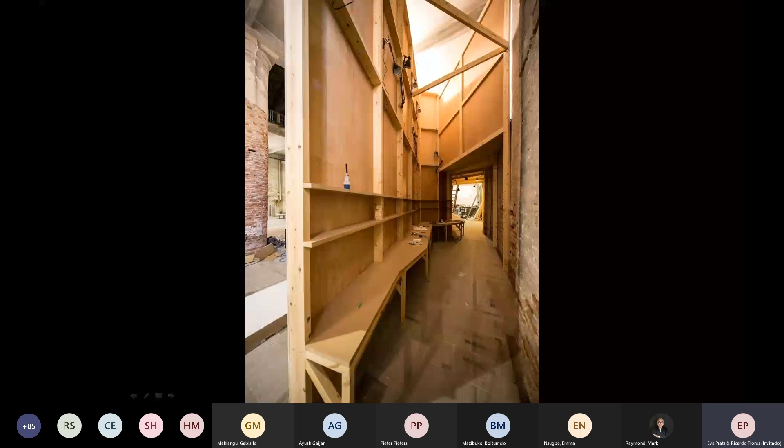So suddenly the door is there, the hole in the plasterboard where the light would come through. This becomes solid. The door is waiting for you, and at the same time, the door is already there in the chapel. So now everything is solid—nobody thinks that it is empty inside. It's like a fragment of a piece of construction there.

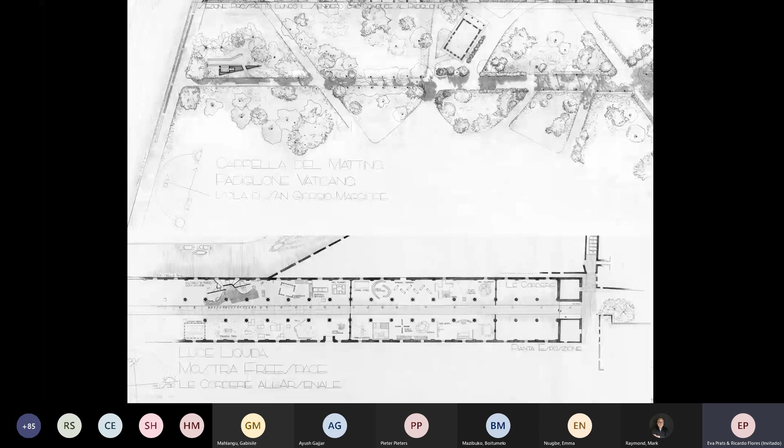And it's very interesting because later, when we were doing the situation plan, we much later understood that we were doing the same movement in two times. In the upper part of the drawing, you find yourself walking on the island along this path, and once you walk, suddenly you find this inclined wall, and then you cross through, and then you find hidden this chapel. The same thing happens in Le Corderie. When you enter, you walk some 100 meters or so, and suddenly there's this wall inclined again, another door waiting for you, and behind you find all the backstage, all this unexpected thing that you wouldn't expect from the front. So we were doing the same movement twice.

The natural condition of the place was very present. The water and the pines and the light reflected on the water of the lagoon were constantly with us. So it's very blunt and very mute from this side, but once you cross, you find this other space that is open to the forest, as I said.

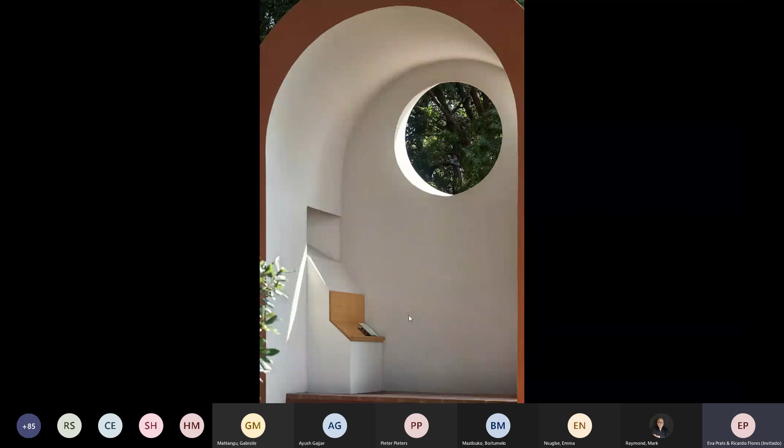So it's not dedicated to the Catholic Church—there are no symbols there, but all the promenade, all the ritual is there. You have the door, you enter, then you find a little altar a bit up. You see the steps, you walk up, and then you see a little place with some drawings. You get close to them, and then suddenly in the drawings you understand what it's all about. You see the sun in the drawing, and then the forest surrounding the church, and then suddenly you realize that there's someone or something looking at you from above, and you raise your eyes, and then you see this element, which in a way clarifies a bit more what it's all about.

So all this ritual of the chapel is there, even if it's not dedicated to any specific religion, because we thought it was good to open it up to anyone who'd come to the Biennale from any country, any cult or belief. So it's something that is open, not protective.

If it's open to the elements, if it rains, you can get wet. You feel the wind. It's projected to nature. You can see the sun coming everywhere. So it's a shelter, but only a little, because it's quite open.

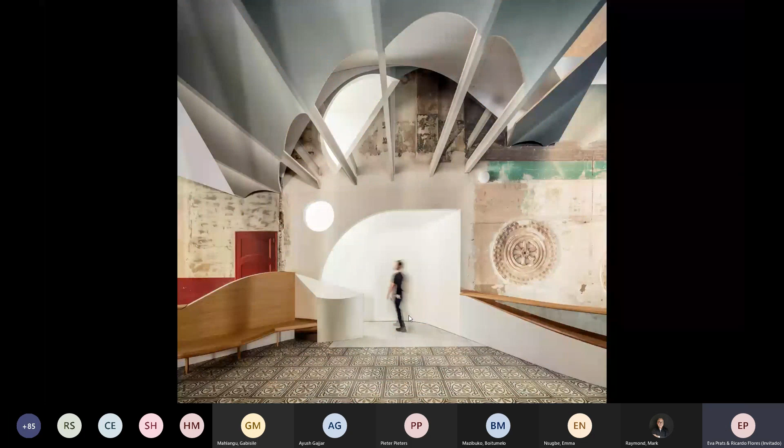So this condition of unprotection, of a ruin in a way, of something left there, and you find yourself almost exposed, has the same character as the Sala Beckett on the other side. So you have this fragment of ruin, activated by the light of Venice, but you don't know if time is moving forward or backward, if you are recuperating or if things are getting even more destroyed, more like a ruin.

The photograph of Sala Beckett matches very well with the Corderie walls, which were also in the same state as the Barcelona building. So you would enter, and see all these models on legs walking to welcome you, and then once you raise your sight to the window, there is this little model we made to explain this fragment—where does it come from?

This fragment you were visiting is from the first floor of a building far away in Barcelona. Then you would walk and find this lighted space, walk through, and suddenly see all this backstage with the whole story of the project—six years of project in these 15 meters of length. So you see the cooperative, the workers' cooperative, then the competition, then all the documents of the construction.

The drawings of the color, everything we were talking to you about before, were there. All the doors were there. Nobody failed to be there. Everything was there. All the drawings of the process—you could spend more or less time looking at them in this space. And then there was also this letter in the corner, with the mock-ups and all the patterns there.